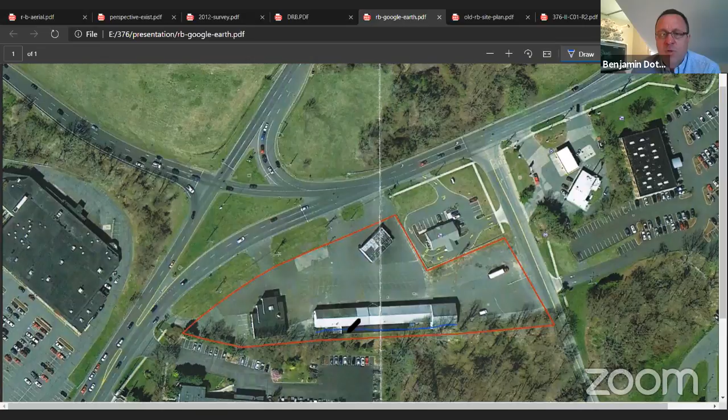Really, all we're doing is asking to keep what we already have in place with a new plan that shows this larger building there. The plan that was there before, as you can see, this is an aerial of what the old Robert Buick looked like, where we had complete encroachment on this side yard here, with a portion of this building and this building. And again, what you have today is a significant improvement over what's out there.

And if the variance is granted, we will submit to P&Z a revised site plan application. Happy to answer any questions anyone may have. And I did forget to mention, with me tonight is Darren Bailuni, one of the owners of the property, and he's watching this application as well tonight.

All right, I have a couple of questions, and then we'll see if anybody else has any. I was there, I remember well. In fact, I went back and found the minutes, about 4 pages of them from that night, from this particular application. Yeah, we granted a boatload, I think about 10 variances that night. I guess my question goes to hardship.

I mean, how many service bays are in the original building? How many are there now? The original building has 19 service bays, and we're adding 8 to it, so it'll get us to 27. That's not an unusual amount of service bays. As far as the hardship, in my opinion, it's the unusual shape of this lot and the fact that our building is already there. But yeah, again, it's an 8-bay addition, it would bring us up to 27.

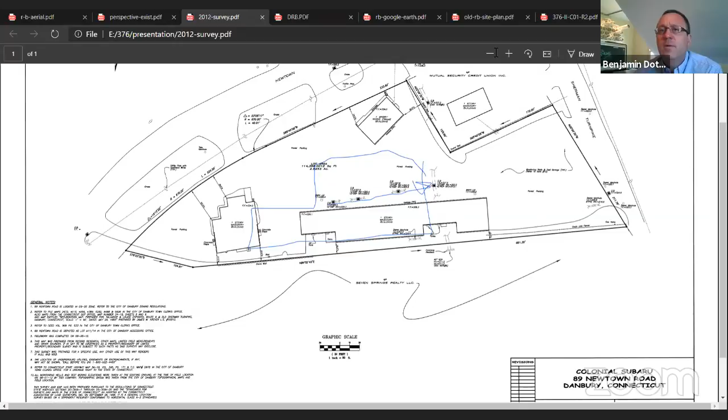As you can see, in 2012 the entire site was virtually paved. So when we built the new building, we favored this direction, and the actual existing building is not constructed on the storm drain. In fact, that dictated most of the site design and layout, and one of the reasons we started the building wall this way and constructed in this direction.

We could not put that addition here today. It just wouldn't work, nor would it make sense if you ever had to get in there and fix that storm drain.

But our drainage rod does go to that storm drain, and we maintained pre-2012 drainage rates. In fact, if you could see these three little manholes, that's a very expensive oil water separator. So if there's ever a spill on the site, it gets contained in there before going into the storm drain and discharging onto the neighbor's property.

All the drainage here, we will not be increasing runoff. As you can see where the proposed building is going, it's in an area of pavement, and we're going to be tying into the same system that we're in today.

I think that answers my questions. Anyone else have any questions for Mr. Doto from the board? No questions.

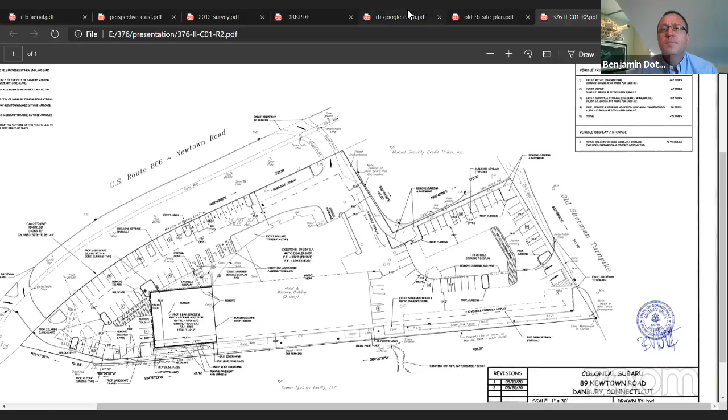I see here that I don't see anyone regarding Crane Street other than Mr. Ylagan, so it looks like we're going to have to continue this. Hold on, Mr. Chairman, there's a Josselin Medina. Is that her? Yes, she has to unmute herself. Oh, I think I see, she called in. Okay, there she is.

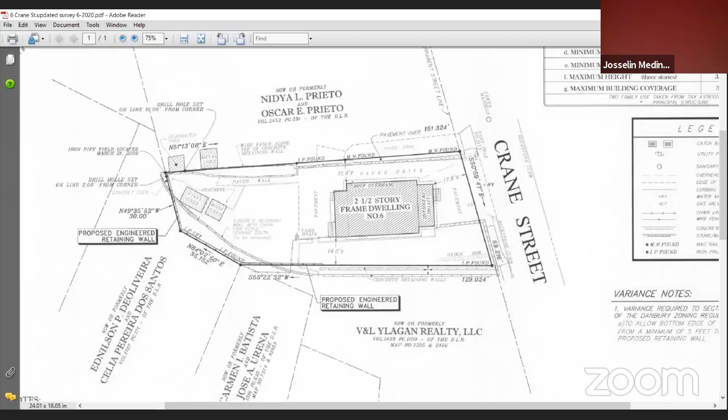Yes, when we moved to the new property, the existing retaining wall along the south property line was in disrepair. Due to the existing grading of the property and condition of the existing wall, we decided to replace the wall due to the conditions and safety of others. So we had a survey prepared and also have an engineered retaining wall layout plan prepared. We plan on replacing the wall along the property line. In order for us to construct the engineered wall, we will need to excavate within 5 feet of the property line. So we believe the variance being requested is the minimum variance necessary to allow reasonable use of the property and is generally in harmony with the spirit of the zoning district. Furthermore, we believe the variance will not adversely affect the public health, safety, or welfare of the public.

So I know you can show on the map, the old wall is already almost falling. So we want to replace it with a new one made of concrete and iron. I don't know if everybody can hear me.

Yes, we hear you. So this would be along here, those 2 sections, is that correct? Yes, we want to build the new one on the property line.

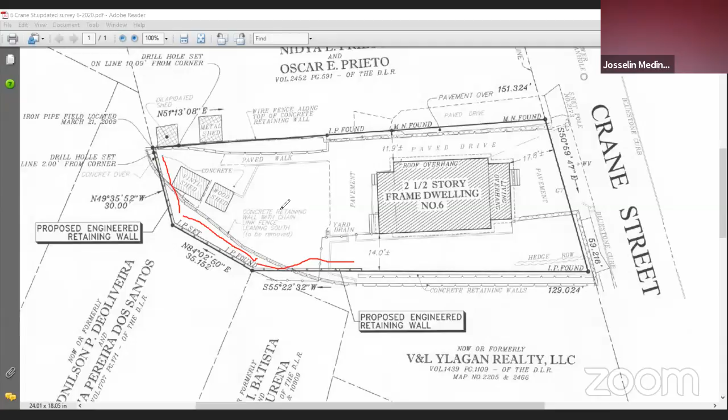Okay, and you said you've had an engineer design this wall? Yes, we asked David Cruz. I don't know if you've heard of him before. Not sure. Yeah, he helped us do the engineer contract. All right, and also the survey.

You're redoing this wall because the one that's there is dangerous for our neighbors because it's almost falling. It's gonna be a danger for our neighbors if something happens and it falls on their house. We're gonna have troubles with them, that's why we want to do a new one.

Okay, I walked the property, and it's kind of hilly with this steep pitch, which would explain why they would want 8 foot high walls. And then walking the property, what they're trying to also correct here, and on the map it shows you easily, is encroachments, so that the boundary line is the line of the wall, the engineered wall itself. Because of the steep incline, the 5 feet setback would be kind of tough, it would probably come out 10 to 12 feet.

Right, yeah, I was there too. And it is kind of dilapidated, that wall. No doubt about it.

All right, any other questions? Any questions from the board? Nope. All right, anyone else here to speak in favor of this application?

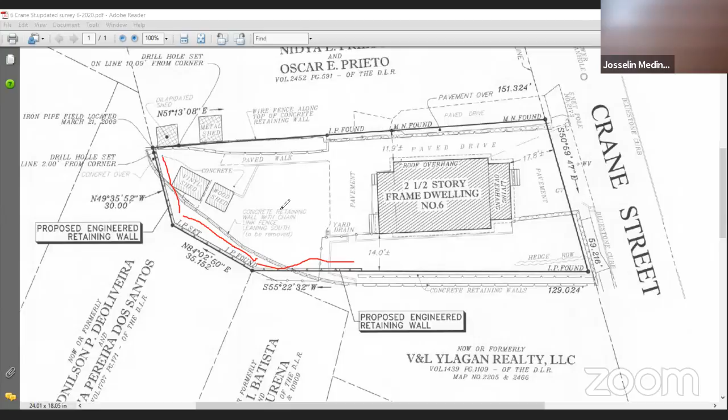And if you have no problem with that wall, but you do have a problem with access with the concrete, it doesn't matter, we can do through my house. We asked just in case, but he said it's fine. So if he doesn't agree with that, we can do it on our properties. I'm sure there's a way to get the concrete back there if they have to. It doesn't matter, we just want to do a new wall because we want to prevent some damage to our neighbors, or someone can be unsafe.

All right, okay, any other questions from the board? One last time, any other objections? No, I think it could be worked out.

There's a trade-off. I mean, you could use either a pump to pump the cement, or if the cement truck goes on the doctor's property, assuming liability for, say, the asphalt gets damaged, that could be fixed.

That's entirely up to the doctor. He will not allow that, and that's fine. There are other options. Doesn't matter, we can do it through our house.

Do we have a motion to close 20-18? I make a motion to close 20-18. Second by Mr. Hannah. All in favor? Aye.

All right, the application is now closed. Do we have a motion to go into executive voting session for both of these applications?

No one wants to vote tonight, huh? I make a motion we go into executive voting for 20-18 and 20-19. Let's do 18 first. Second, all in favor? Aye. All right, 20-18, the one we just heard, 6 Crane Street.